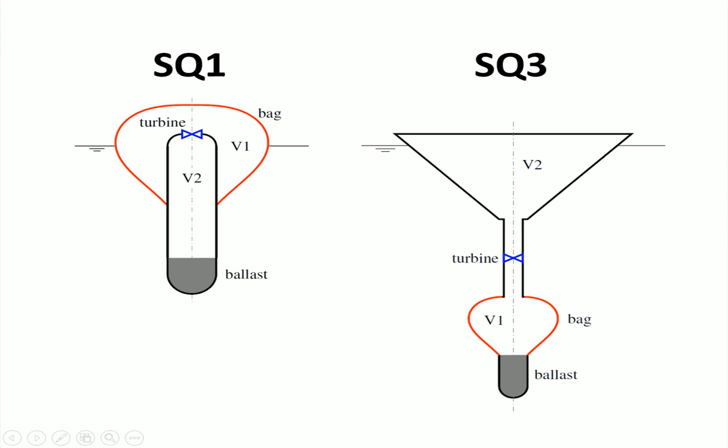We have done two series of tests for SQ1. The first one we did was last year, and it was focused mainly on pumped oscillation tests, where we drive the device in still water, forcing it to heave and radiate waves. And the second series was mainly on estimating the power capture in regular waves.

And in model scale, in order to get the compressibility correct, we have to provide additional volume, which can be quite large. So in the setup, we have a flexible hose coming on top of the bag, which comes into an additional volume to represent the volume enclosed by the bag in full scale.

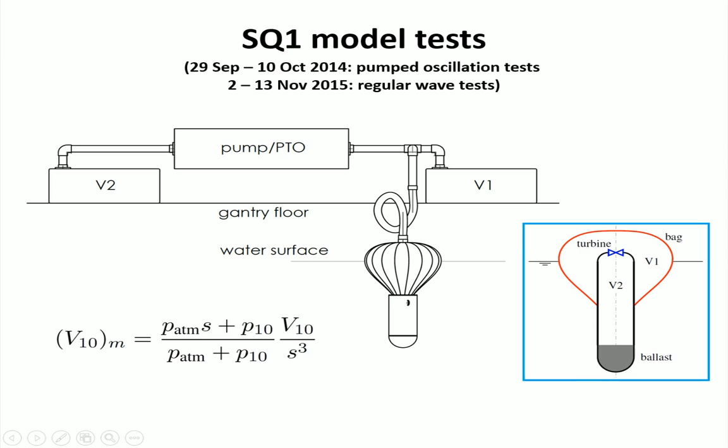And one thing we discovered during our first test is that it is possible for the bag to have two different shapes for the same pressure, which is quite unexpected. But then we were able to confirm this numerically as well.

And these are just the videos showing the device pumped in still water. As you can see, these are the two possible shapes for the same pressure. But note that the amount of air in the bag is different, although the pressure is the same.

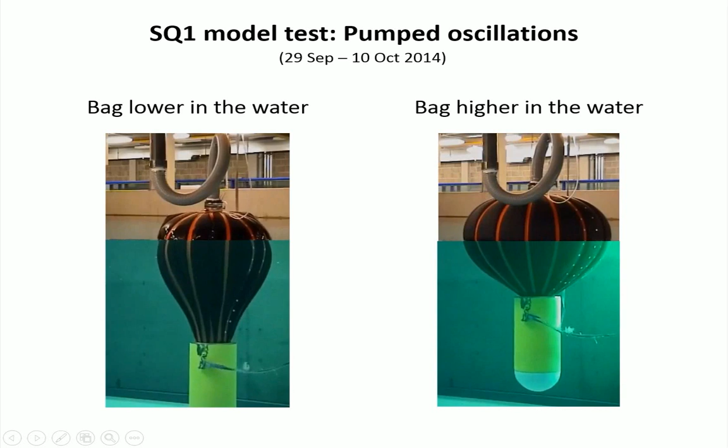And this is our recently concluded test. Here you can see the device and the power takeoff, and we use 3 air tanks, each with a capacity of 1.1 cubic meters, and we have 2 valves which we can open and close to investigate the effect of different volumes for V1 and V2.

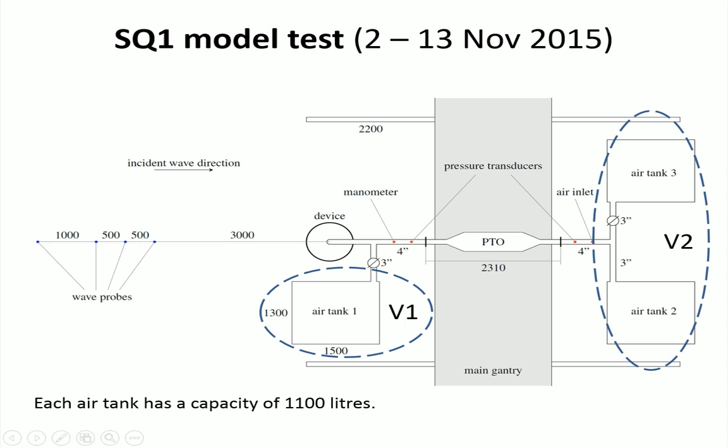And there is a photograph of the setup. You can see the PTO here is a series of capillary tubes and the 3 air tanks. And this is the device in water.

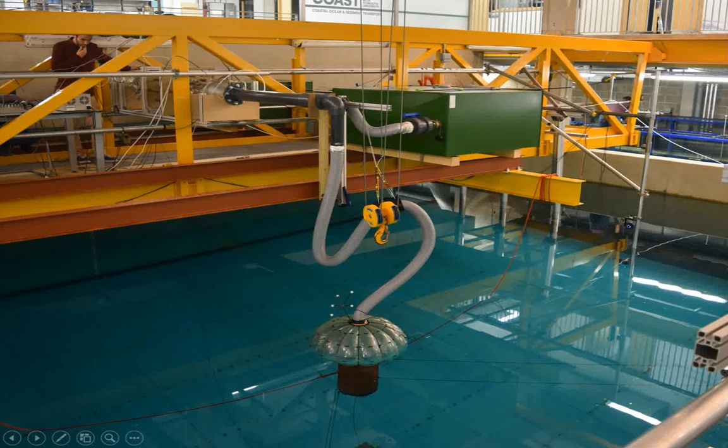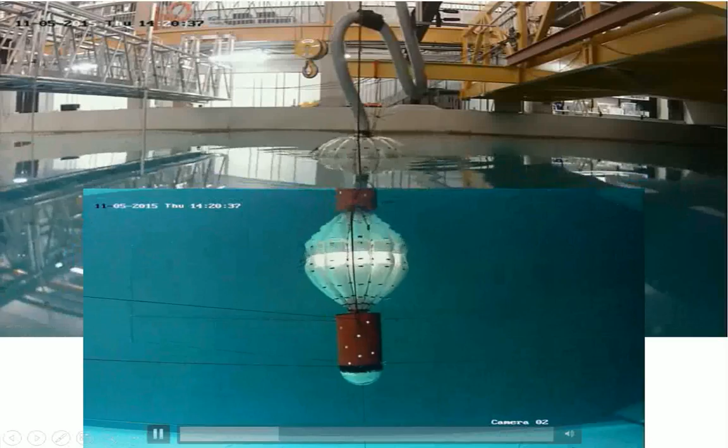And one of the things we did during our recent test is to investigate the effect of having mooring lines, which were used to limit the pitch of the device. Here, as you can see, the mooring lines were taut, and the device is not pitching a lot. And here, the mooring lines were slack, and you can see the pitch is quite significant.

And it is interesting to see that limiting the pitch of the device actually gives a higher power absorption, and it is seen quite consistently across the different cases here. The circles are with the moorings loose, whereas the crosses are with the moorings taut. That is, the device is restrained to heave only.

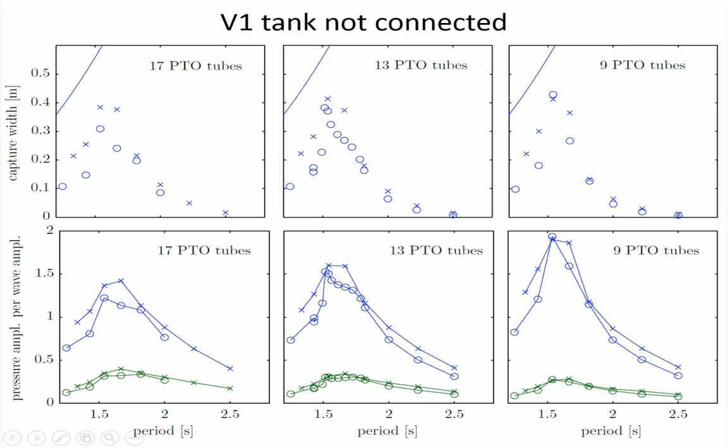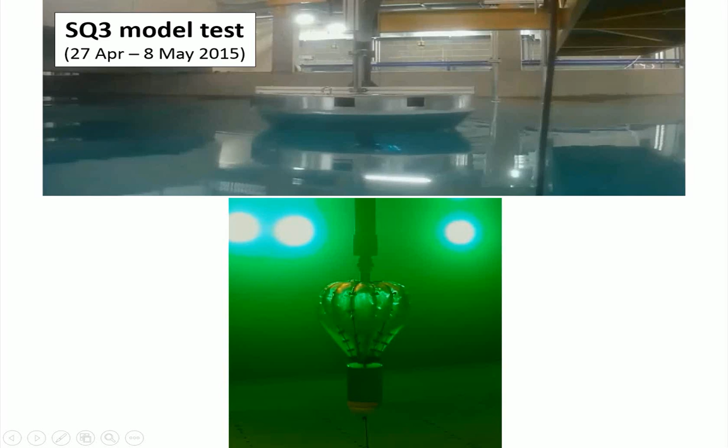And this is the test of the SQ3, which we did earlier this year. You can see a more dramatic motion of the bag, since the ballast is oscillating quite a lot.

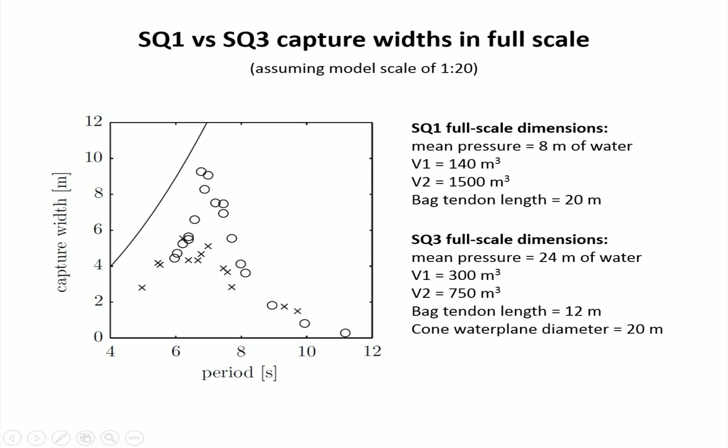And here we compare the capture width of SQ1 and SQ3, scaling it up to full scale, assuming a model scale of 1 to 20. The circles are the capture width of SQ1 and the crosses are SQ3. And these are the different dimensions of the device in full scale. As you can see, SQ3 has a lower capture width, although it's a bit broader, but SQ1 has a higher capture width, although the volume of the second volume is double that of the SQ3.

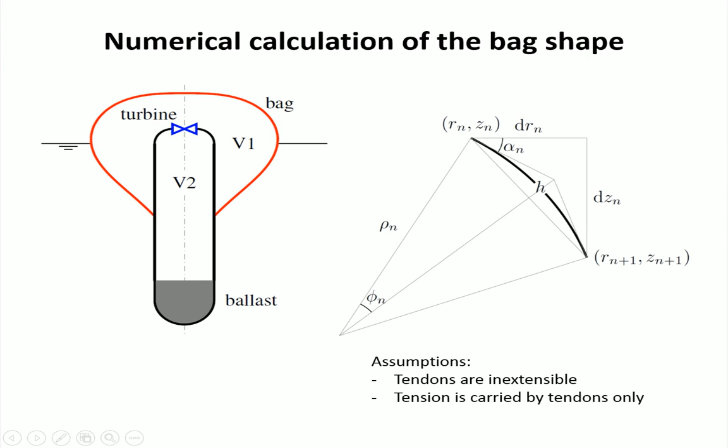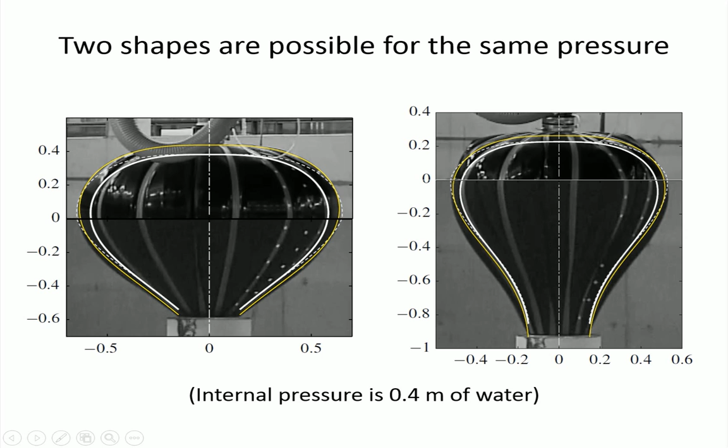And now I will talk about our numerical modeling. First, we have to have a method to predict the shape of the bag in still water, and to do that we make several assumptions. The tendons are inextensible, that is the red line here, and the tension is carried by tendons only, not by the membrane. And these are the two possible shapes for a pressure of 0.4 meter of water, and we have predicted this numerically, and you can see a reasonably good agreement.

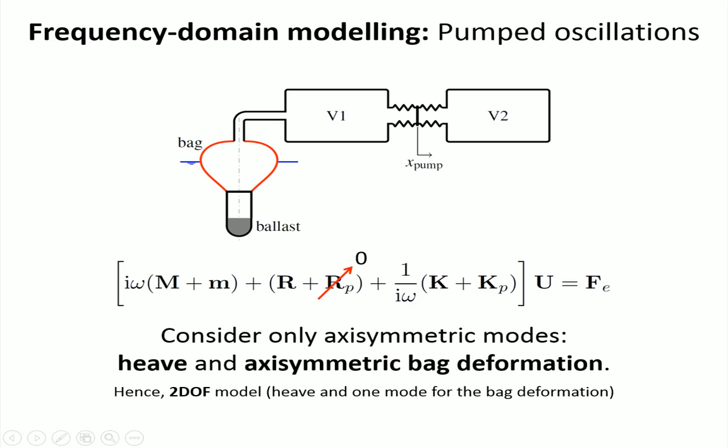And then we developed a frequency domain model to simulate the pumped oscillation case, that is forcing the device to heave in still water. And we use this equation of motion. And for our model, this is a simplified model. We consider only heave and axisymmetric deformation of the bag. Hence, there are only 2 degrees of freedom.

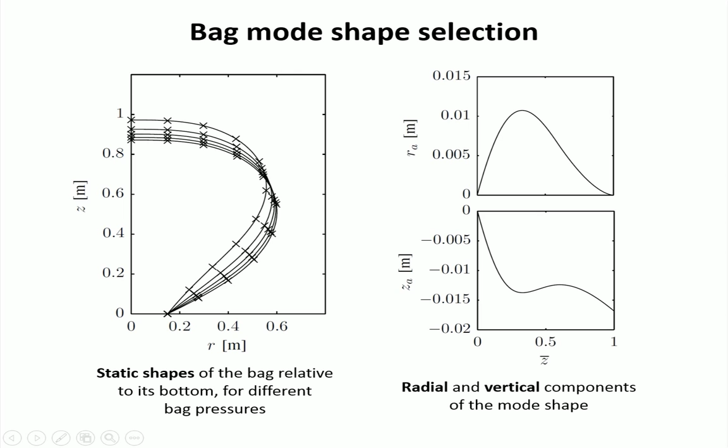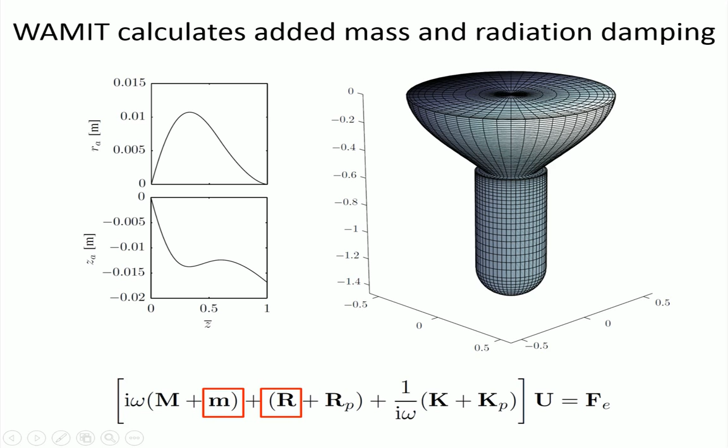And for the deformation of the bag, we need to select a mode shape. And this is obtained by taking the difference between 2 static shapes of the bag obtained under different pressures and different elevation. As you do that, you can separate it into radial and vertical component, and this can be input into WAMIT together with the geometry, the mean geometry of the device, and WAMIT can calculate the added mass and radiation damping, and you can solve this equation of motion.

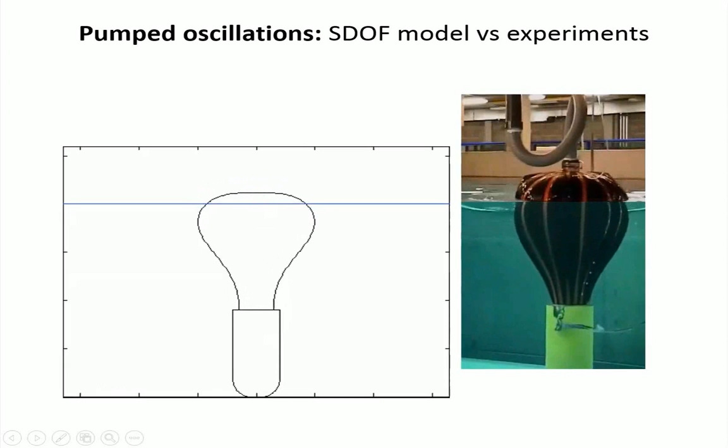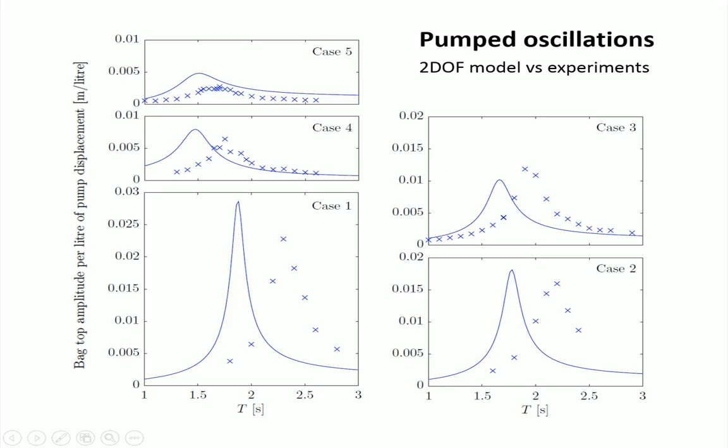So here is our numerical prediction compared to the experiment. There are some slight differences here because this is a simplified model. And when we plot the amplitude of the top of the bag for different cases, these are with different amounts of air in the bag, case 1 to 5. Case 5 is with the bag higher in the water, the bag is tighter, whereas case 1 is with the bag lower in the water. As you can see, the numerical prediction, there is some disagreement in the resonance period.

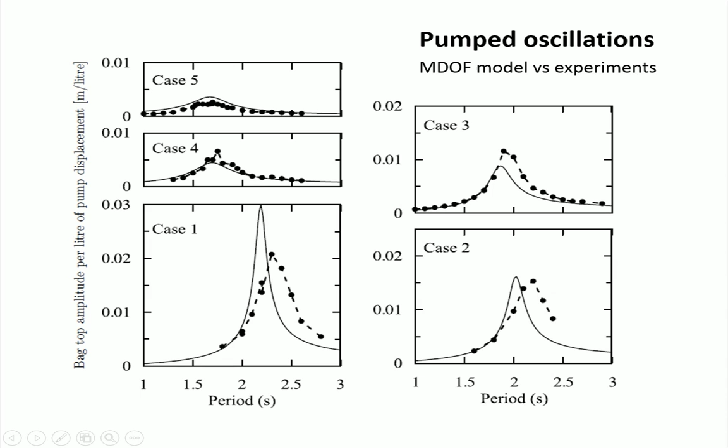But we have also developed a more refined model where we discretize the bag into many small elements. So there are multiple degrees of freedom. And as you can see, the agreement is better with the experiment. So as a conclusion, we have confirmed by experiment and numerical modeling that SQ1 has longer natural periods than a rigid device of the same shape. But the natural bandwidth is also narrower because it is compressible, so it doesn't radiate as much as a rigid device.

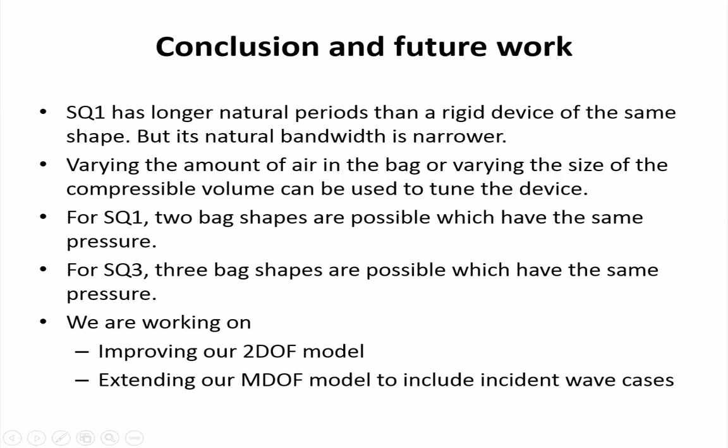And then we can possibly tune the device using two different ways. First, by varying the amount of air in the bag, and also by varying the size of the compressible volume, which was done in the test by opening and closing the valve connecting to the V1 air tank. And for SQ1, two bag shapes are possible, which have the same pressure. But for SQ3, up to 3 bag shapes are possible, which have the same pressure. And we are still working on improving our 2-degree of freedom model and extending our multi-degree of freedom model to include incident wave cases.